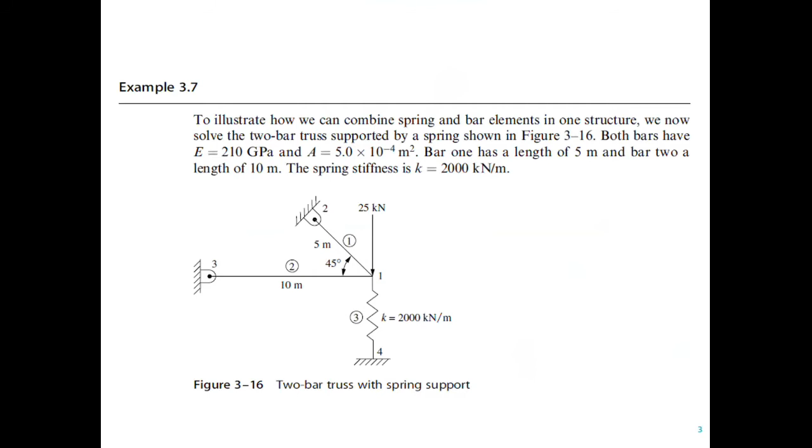I don't have to work with this machine, right? See, my default is taking me here. Okay, now let's have the... how do you move the... I'm using the arrows but the arrow is not working. Escape. Space. Space will work. Yeah, did we do this problem? Yes, yes, okay.

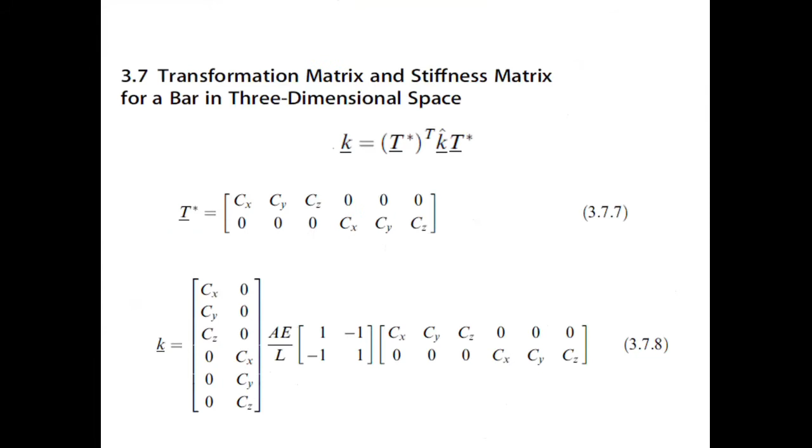This is what? If somebody asks, what is this? Everybody with me now, you have to be all on track. Okay, this is what? This is transformation. No, this is the stiffness matrix.

Of a 3D truss element in 3 dimensions, right? Yeah, with respect to the global system. Those who are coming here, they didn't come last time. You have a member, a truss. The local - this is local. Yeah, global, this is global because there is CX, CY, CZ. So basically, if you have a truss member, and this is node I, and this is node J, and this is X, Y, Z.

The direction or the location of this truss, what comes the global axis? The local axis should be x should be along the member, right? You remember this? Yeah, this is your x prime. This is your y prime, and this one here is z prime. So the prime system is called local. The x, y, z, the unprime system is called global.

Okay, so I don't need z bar, I don't need y bar. The only thing I have to define is the location of x bar with x, x bar with y, and x bar with z. So x bar with x, we call it alpha. X bar with y, we call it beta. And x bar with z is gamma. And then we define cx, cy, cz.

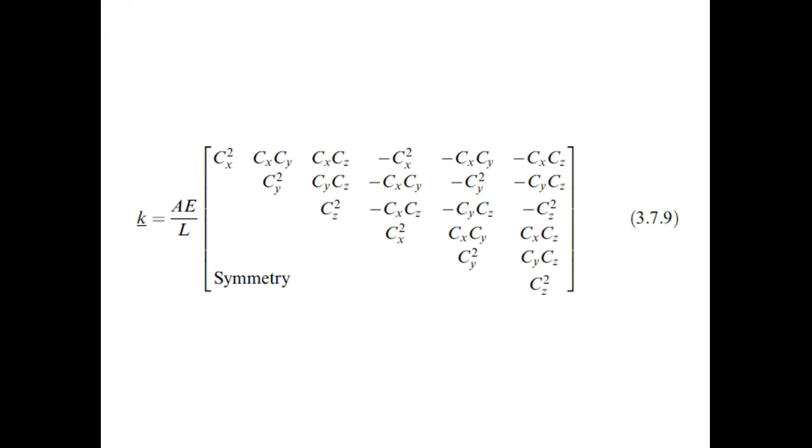Anybody will tell me what's the cx? Cosine what? Alpha. Cosine alpha, cy, cosine beta, and then cz, cosine gamma. That's it. And once you know the direction of alpha, beta, gamma, then you can find the stiffness. Okay, in fact, we solve a problem here. We solved this problem, if you remember.

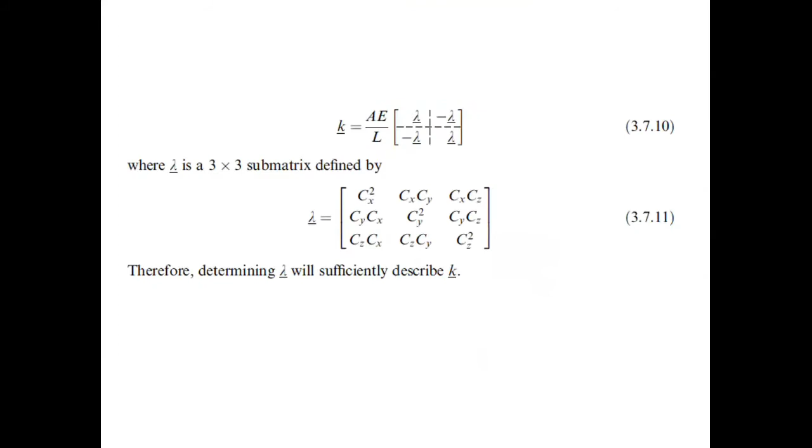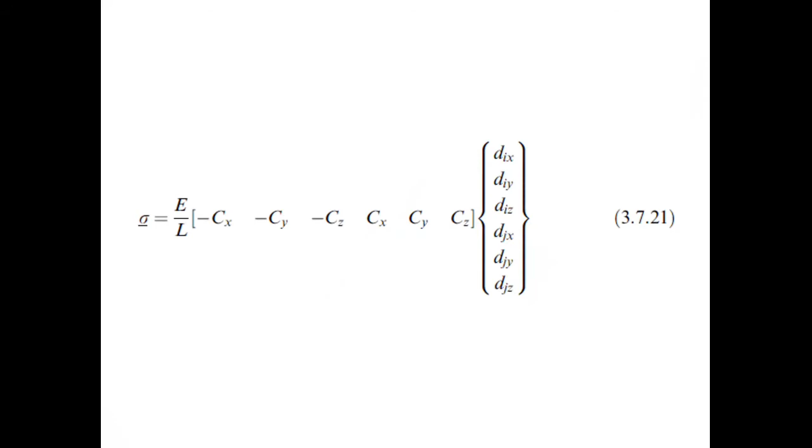This is always what we call transpose. Any vector D, if you put D like this, it means column. If you put D transpose, it means row. Anytime you see transpose, it means row. Anything you didn't understand, we'll talk about it now, when deriving something else.

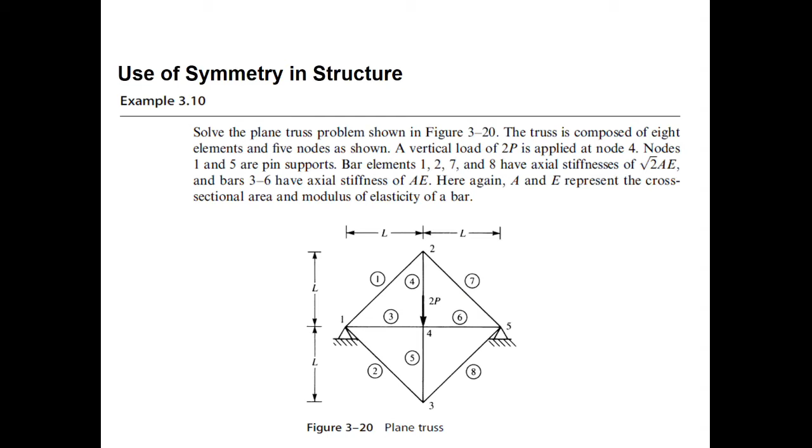Because you are slicing it, you use half of the stiffness to the right. We use the left part, we put P, but 4 and 5 is half of the stiffness.

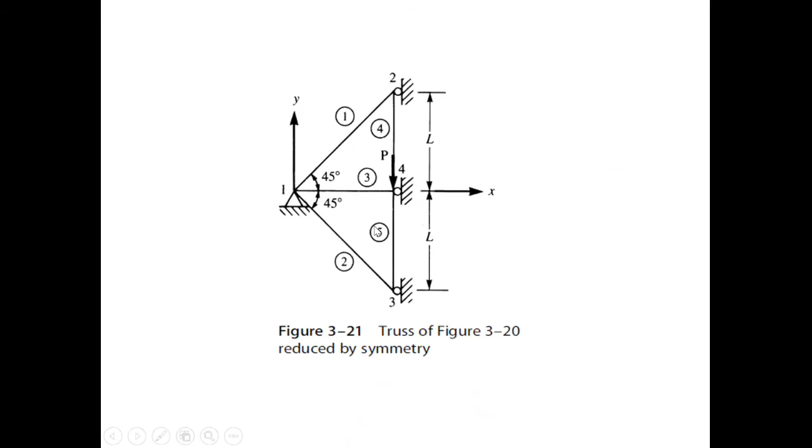So you can see that we got theta. What is this theta? This is alpha. We only need to define alpha - alpha with X, alpha with Y, and alpha with Z.

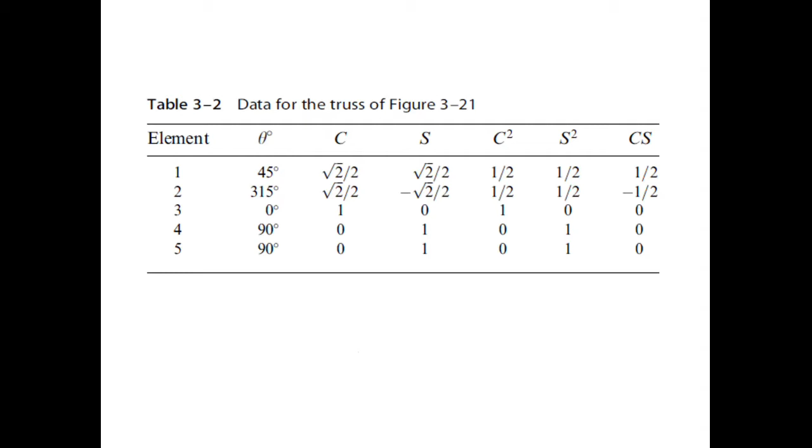Which is CX, this is 2D. Which means alpha, which means X prime with X and X prime with Y. So it is C and S. That's 2D - I think we got 3D too, right?

Let's talk about this. What happened here? If you have a truss like this, you can see. We already did this - well, we didn't do it exactly, I just mentioned it but didn't explain it. So I'll explain it now.

Now what do we have here? One, two, three nodes. And how many members? 3 members, 2 supports.

The problem is that we always need to define our boundary condition with respect to the global, but sometimes we cannot define it with global. Like support number 1, you will say U1 is 0 and V1 is 0, but you cannot say U3 is 0 and V3 is 0 - you cannot define it with respect to X and Y.

So you have to define it with respect to the local. It means you have to talk about U3 prime and V3 prime. Which one is 0? V3 prime is 0, but U3 prime is not.

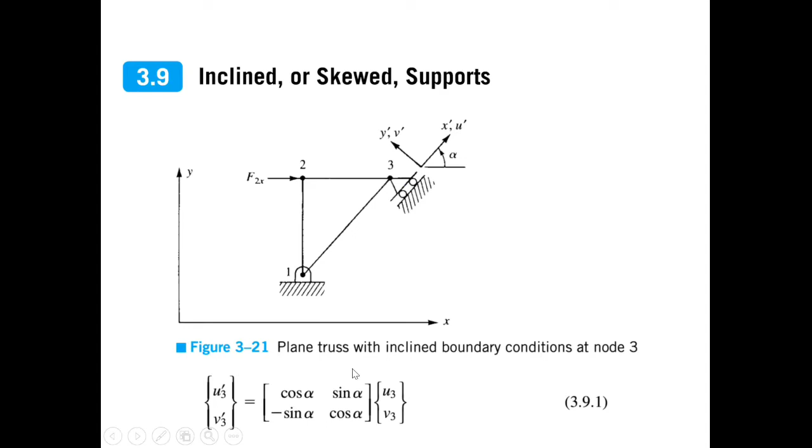So how do we do that? The problem is that this is the local displacement - you are making them global displacements through transformation. You already know that.

This is the global displacement. If you multiply by the transformation matrix, which is 2 by 2, you get the local. How do you go to local? This is the transformation, we call it T1, and this is D. Now how do you find D?

If you want to find global, what do you do in this equation, 3.9.4? You have to multiply both sides by T1 transpose. This one will be T1 transpose, and if you multiply here by T1 transpose, it will be identity. So you'll get D - do you agree that D will be equal to T1 transpose times D prime? Yes.

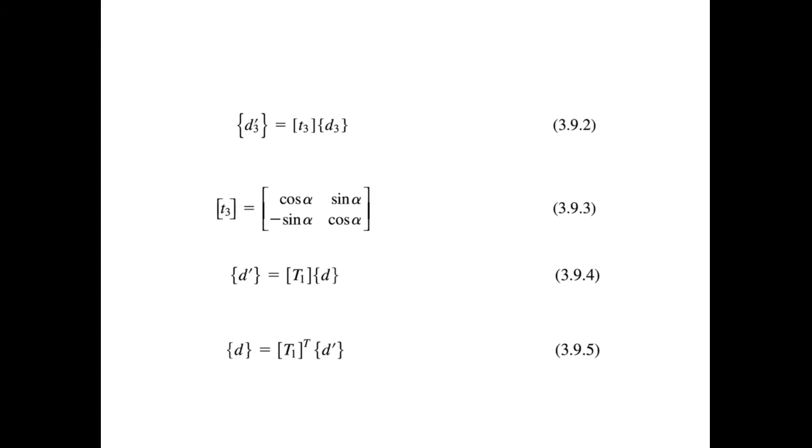So where do you need transformation? You didn't need transformation for node 1, you didn't need transformation for node 2, only for node 3 - this is why: identity, transformation. Now can you tell me this square submatrix, what is the size of that - the small one inside, like I, 0?

2 by 2. Because the transformation, already you have it 2 by 2, cosine sine, right? It's 2 by 2 because you have only 2 displacements. This is 2 dimension. We talk about 2 dimension, okay?

So this one here, the T1 will be, what is the size of T1? 6 by 6. 2 by 2, 2 by 2, 2 by 2. If you don't understand, you have to ask me, okay? Who didn't answer? Who didn't understand this?

You have 3 nodes. Node 1, node 2, node 3. For node 1, global, so you put I. For node 2, you put I. Also identity, I means identity: 1, 1, 0, 0, right? And 0 matrix means 0, 0, 0, 0. Okay, so you will use this as your transformation.

Look here, this is your transformation. What is this? Local. What is this? Global. Okay, let's talk about global U1 V1 with local U1 prime V1 prime. What do you think? It will be the same, right? Because this is 0 and this is 0. You will have these zeros.

Okay, what about node 2? Global, you multiply it by identity equal to local. So it means what? Same.

Look at node 3 where you have inclined support. Do you think global is the same as local? No. Global U3 V3 equal transformation times local. So you can see here that you have to have that, you have to have transformation like this. But this is only an intermediate step, this is not the whole step, okay?

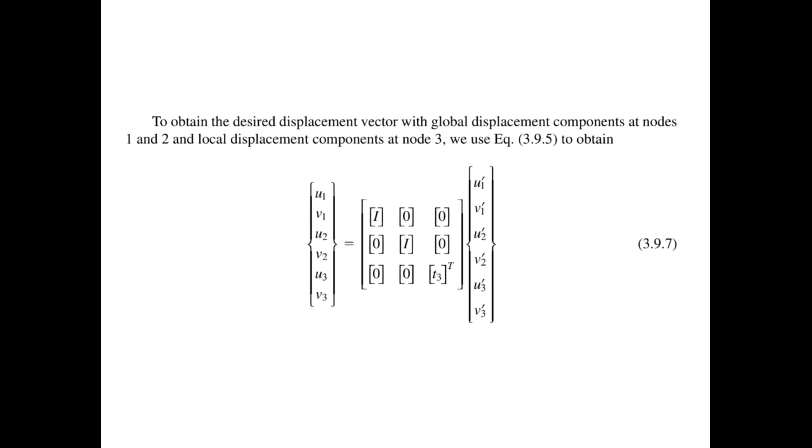So we want to get something like this. I hope you understand this page. This page is crucial, okay. The first one, do you understand the first one? The local equal transformation times the global.

We have it before. Okay, now how do you go from 3.9.8 to the other one? What did we do? No, how do you go from 3.9.8 to 3.9.9? This is a normal equation. They have nothing to do, right? They are independent. One is transformation and the other one is force equal stiffness times the displacement, right? They are not related, okay.

Now go to this equation and multiply the second equation by T1 here, okay, and T1 here. K is K. And instead of D, I put what? T1 transpose D prime. Do you agree?

Okay, now you are the boss in mathematics, mashallah, right? Can you multiply three matrices together? Yes, using Mathematica, and you give me a big matrix. You can do it, right?

Have you noticed something here? Notice here, what happened? For 1 and 2, you put it global. For 3, you put it local. Look at the forces. The forces at node 1 and node 2, global. But the forces at node 3 is what? Local. So it's mixed mode.

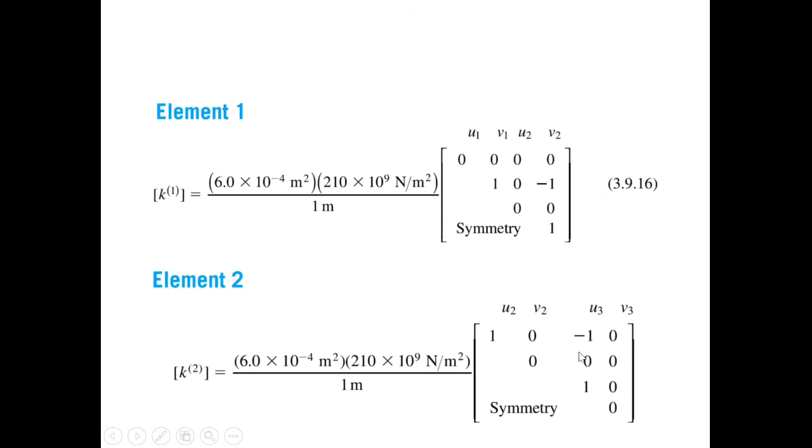Yes, look. Element number 1, it's connecting node 1 with node 2, so U1, V1, U2, V2. Okay, for element number 2, global. We didn't talk about the support here. Okay, even for element 3, U1, V1, U3, V3, everything with respect to the global.

So the total stiffness will be with respect to the what? Global. Okay, can you assemble those? Yes, it's here. So this is U1, V1, U2, V2, U3, V3.

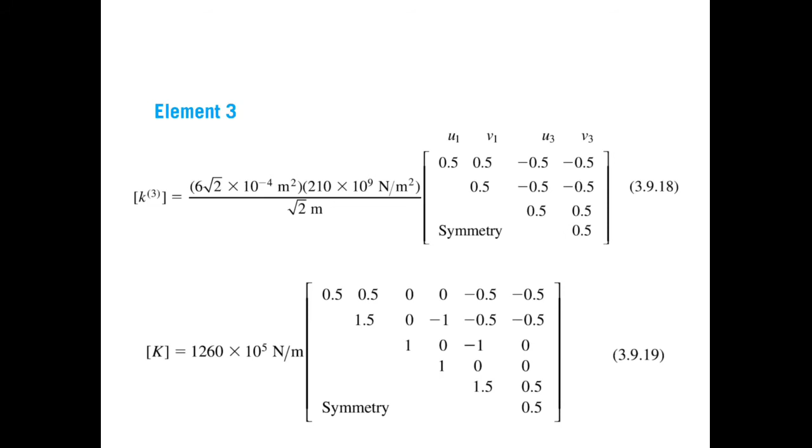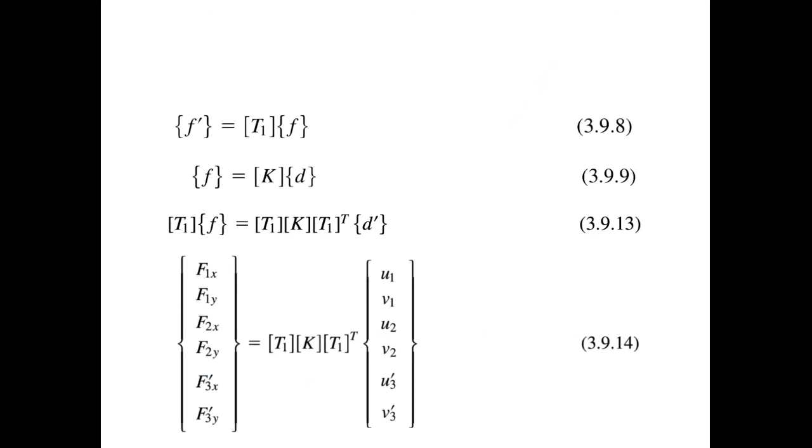What is U3 prime and V3 prime? Not here, you have to apply it in the equation. The only thing now you have is what? Capital K. So you have only this. You have to know what is T1 multiplied by T1 transpose. Okay, so we finish now with capital K.

T1, node 1, what? 2 by 2 identity. Node 2, identity. Node 3, this is the transformation: C, S, minus S, C, right?

Okay, take this one, multiply it by transpose and do everything. You see, T1 K T1 transpose. If you do all of this, you get this. But now, once you multiply them together, then you have U1, V1, U2, V2, but you don't have U3, V3. What you have? U3 prime, V3 prime. You have different steps. Easy.

Now, can you tell me what would be the forces?

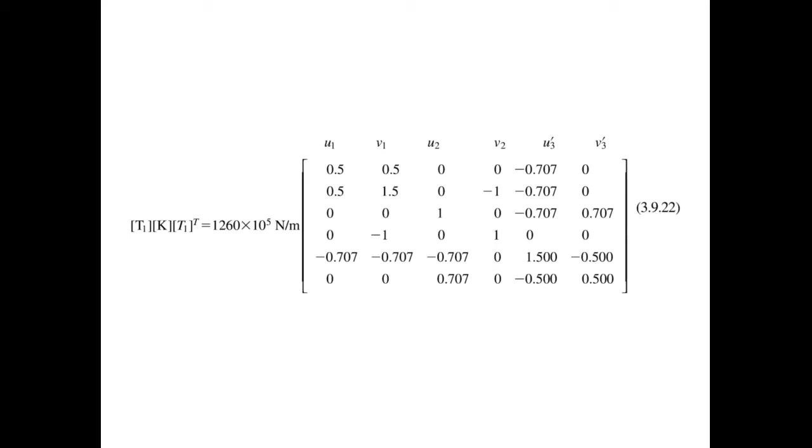Do you know what is U1 and V1? Support 1, hinge, we know them. Okay, you want to see the figure? Okay, U1, V1, how much U1? Equals 0, equals 0, unknown, right?

V2 is for the support 2. Which one is 0? V2 is 0, okay this is 0. What about this one? Unknown, which one is unknown? U3 prime? Both are. No, U3, you get it. Roller, so which one is 0? V3 prime, right? It cannot move perpendicular, so V3 is 0.

So now, very good, you found what? 4. You need to have more, 2 more. Okay, let's go to the forces.

F1x, do you know it? Reaction. F2x, reaction. Let's go to node 2. Do you know F2x? Yes. So how much is that? 1000, I don't know what's the unit. Okay, maybe you need to multiply times 10 to the power 3.

Up, not this one, 2x. This is unknown, okay this one. What is 1,000? 1,000 kilonewton. Okay, times 10 to the 3 Newton. Okay, what else?

Unknown, unknown. What about here? That is the 3x prime. No, 0. Which one is 0? That is 3x prime, is there any force in the x prime? No, there's no force in the x prime. No, this is 0. Wow.

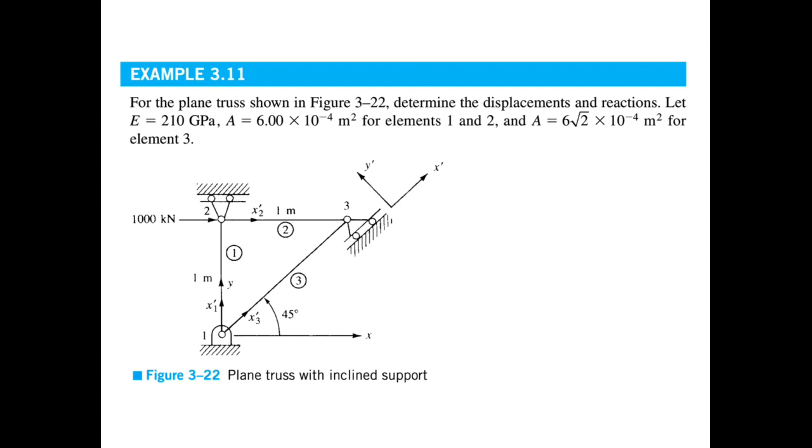Yeah. Okay, can you generate the second equation? Let's see the 2 equations with the 2 unknowns U2 and what? U3 prime. Let's see. I want to see U2 and V. It is here, right? Did you see it?

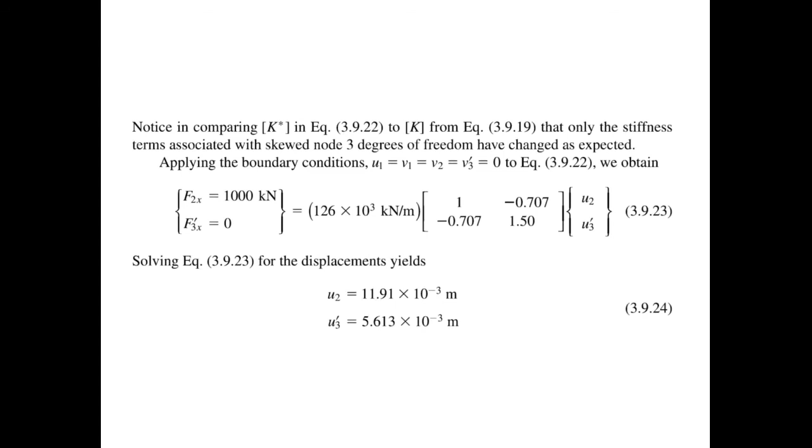What did you see? No, U2 and U3 prime. U2 and U3 prime, right? Okay, can you solve for U2 and U3 prime? Yeah. Can you solve for the forces? Yeah, yes, just substitute. Interesting, right, this inclined support. Okay, the idea here is that you have a mix between global and local. Okay, local if it is inclined, global if it is fixed.

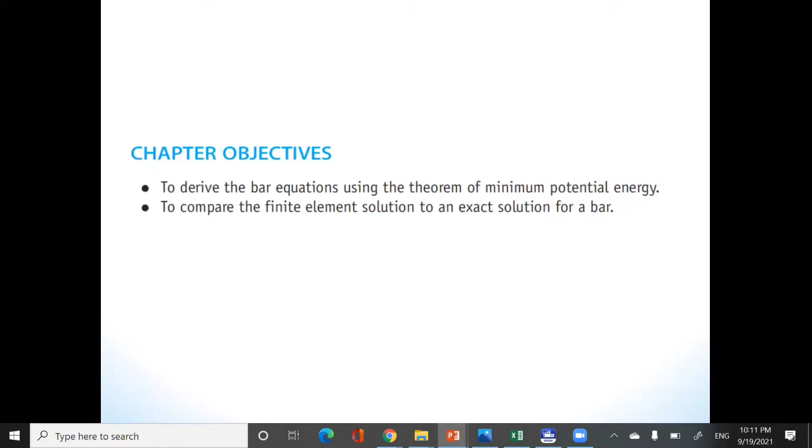So for spring, by the way, you asked me there is a problem with this F equal to K delta square, right? You asked me about this.

This one here gives a different answer because the units for K are wrong. Because you should have force. So this one is force per unit per meter square, so that times meter square, you get force. You should figure this out, right? So K is different, not always Newton per meter. If you say F equal to K delta square, then K will be Newton per meter square, and delta square will be meter square. Then the answer of F will be in Newton.

Okay, coming back to this anyway. So this is a rod here, and we are talking about 1D, and there is a force P. What happened to this? It will create stress, sigma X, uniform, and it will create strain. So now we want to get U and potential energy for this rod.

This one here is your delta, okay? How much is the displacement? It's delta X. So you have to multiply delta X, which is like the original length, times strain on that element, which we call delta strain. Okay, this will be clear in the next slide. Here we go - if you multiply sigma X times delta Y, delta Z, that will be the force. If you multiply the force by the displacement, and the displacement will be delta X times d strain X.

This will give you the internal strain energy. But this is per unit volume. So if you want to get U, what do you do? You multiply it by dV. Do you agree that this delta Y, delta Z, delta X is called delta V? It's the volume of the element. Yeah, now this is du. Why do we put du?

Because this is the strain energy for the element, du. So how do you get the strain energy for the whole bar? This dV, you integrate over the volume. If you do the triple integration, you will get this here, which is the strain energy.

To keep this in mind, imagine this is sigma x, and it's linear. This is sigma x, and this is epsilon x. The area under this curve is what we call U star.

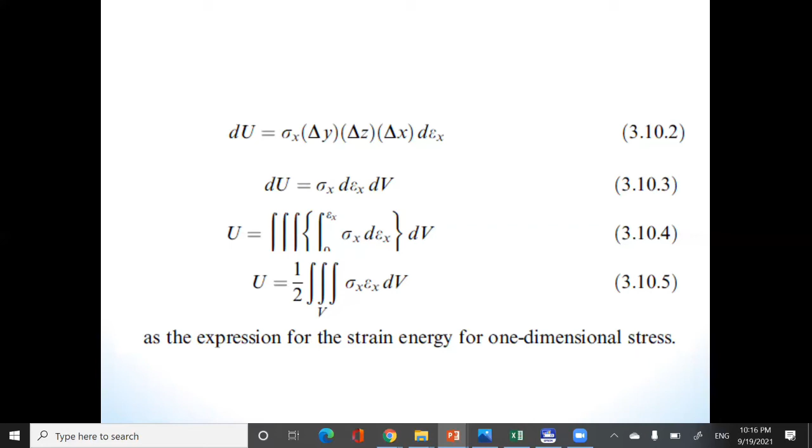Omega. Is this called omega? Okay, omega is the external work. So the external work done, with a minus sign, will give you the potential energy. What kind of forces are in the bar? There are three kinds of forces: there is body force, the weight, body force,

forces which are applied on the surface, and concentrated load. Very simple: distributed load, distributed force, which is like traction, body force, and concentrated force. These are the three forces, right?

So there are three terms here. The first one is the body force. You integrate over the volume. Look here, you are multiplying displacement times the body force. And this body force is body force per unit volume. This is why you multiply the body force per unit volume times dV and integrate.

Okay, what about T? What is it? Traction, which means force per unit area, so you have to integrate over the surface, the area. What about here, F? It's concentrated force, you just multiply force times displacement. So one time you multiply directly the force by the displacement, which is concentrated force, which you see at the node. Node 1, node 2, there is F1x and F2x. These are concentrated force. We finished that.

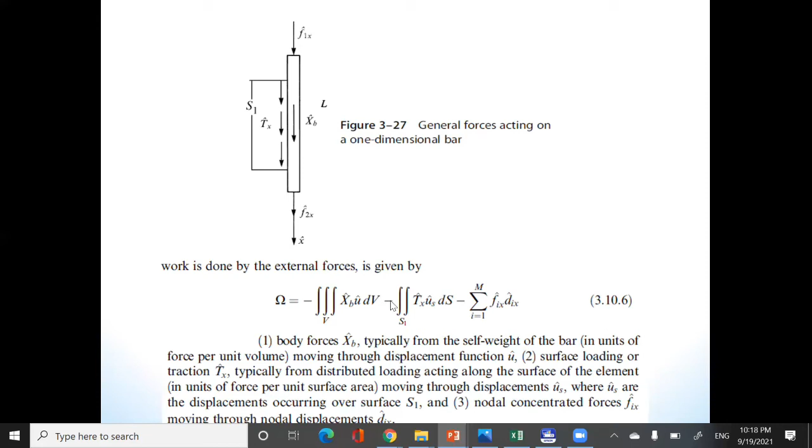So we take these two equations and put them together. So what is this? Do you understand this?

Okay, what if you have a rod here? This rod has an area, right? And it has dx, so dV will equal the area times dx. Put the area dx here, so you have to integrate over the length. You see, from where to x? So A times dx is dV. A is constant for the rod, put it outside the integration, so you integrate over the length.

This term here is U. This is the external work done. This is the work done at the two nodes. This is for surface, and this is for body force. So all of the force is here, and this one here.

But anyway, we want to get to something like F equal to K times D. We want to reach this. How do we do it? This is pi, the total potential. Remember what we do for the spring in order to get the stiffness matrix using minimum potential?

You did homework, what did you do? You have to differentiate, right? Differentiate with respect to nodal displacement, D1 and D2. Because this one here is D2 and that one is D1. So look here, this is D, you have to differentiate with D1x to get one equation, and differentiate with D2x to get another equation. From there you will get the stiffness.

Okay, this is now a very good question. This is sigma x, this is epsilon. Is this a scalar? Yes, this is scalar. What about this, is it scalar? Yes, all of it is scalar.

What about here? This one is a displacement function. Do you think this is scalar? Yes, we multiply this one of them. Oh, this is a vector. And this is a vector. No, this is a vector, and this is a vector. Look, the hat means vector.

This vector, not product, huh? Not product, it's dot product, which means what? Dot product means scalar. It means scalar. Scalar means that this is U transpose, and this is a row column.

Because it's a scalar, that's why I explained to you about D transpose. So the first U, this is transpose, and the other one is this U scalar. So scalar, this is what? Row, this is column. This is row and this is column.

Okay, what is U? U in a vector form. We know it. U equals summation of Ui Ni. Or if you want U, it's called N1 U1 plus N2 U2. Look at it. U is a vector. This vector is called shape function, which is like row times the nodal displacement, which is column. See? N is a row, D is a column. So if you take N is a row and D is column.

So what's the strain? What's the strain definition? By definition, what's the strain? Derivative of U. Yeah, strain equals partial or du dx. Okay, so what does it mean? But U here, we said d dx of U. U, what is U? U is Ni Ui.

Ui is nodal displacement. They don't change with respect to x. The only thing that changes with respect to x is N. It means dNi dx Ui. It means dN1 dx, dN2 dx, times u1, u2. So you are taking the derivative of the shape function.

You are taking the derivative of the shape function because the strain here, look, strain is du dx. But you don't take the derivative of the nodal displacement. They are not function of x. They are specified at a certain location. So what you need to take the derivative of is the shape function. And this one here is dn1 dx, and this one dn2 dx.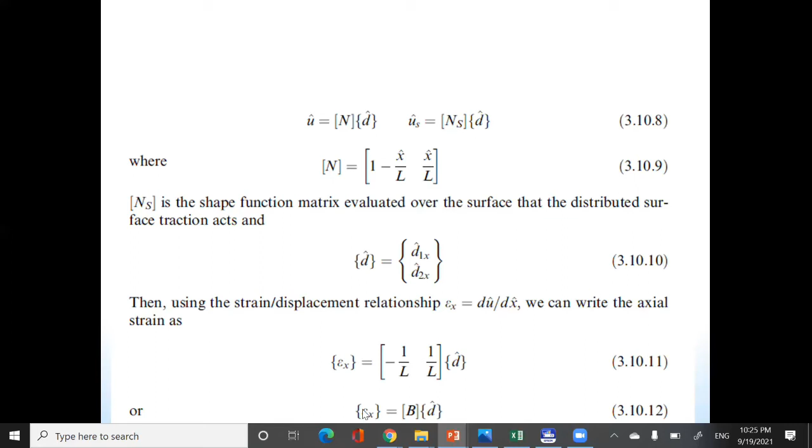Okay, this is now the strain. Very good, we have the strain. What else do we need? Remember the pi. Remember the pi. All of what you are doing, you are finding this. What about the stresses? Because you have to put everything in terms of nodal displacement. How are you going to take the derivative of pi with d1x? Where is d1x here? We don't see it explicitly. That's why we put the strain in terms of the displacement, but we have to put also stress in terms of displacement. How?

Modulus. Constitutive relationship between stress and strain, right? So sigma equals E times epsilon. And this is only 1D. If it is in 3D, maybe you'll have sigma x, sigma y, tau xy. You'll have a matrix. And you'll have here strain x, strain y, gamma xy. This one is called D matrix.

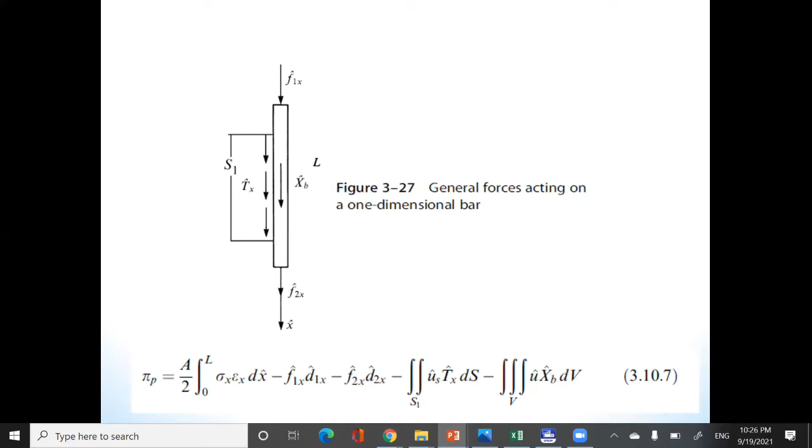So the relationship between stress and strain is called D. But for only special case that this D matrix becomes a scalar and it becomes E for the sake of uniaxial. Okay? So this is why we want to derive things in general. Look at it here. In general, you see sigma equals D times epsilon, but only in this case because it's uniaxial, D equals E. So what do you have? Strain, stress equals D times epsilon. What is epsilon? B times D. Shape function, derivative of the shape function times D.

Can you take this stress and you multiply it by BD and you tell me what would be strain energy? It's here. Okay, look. U, just U, what is U? You said it's half integral over area sigma x epsilon x dx. Okay, integral. We said sigma is what? Sigma from here. D is what?

D times B times D. This is all stress. What about the strain? B and D, dx.

Is this a scalar or not? Scalar. Are you sure scalar? No, I don't see scalar here. What is the scalar? At the end of it, scalar. No, it will not be. It will not be scalar because D is what? 2 by 1. B is what?

Okay, look at it here. Wow, it's here, yes. You see now? You see the stress transpose, D transpose, right? D transpose, B transpose, D transpose. All of this is what? All of this is sigma. What is the strain? B times D. Very good.

We finished now U, and this is scalar. If it is scalar, D transpose, it means what? Is it row or column? Row. What about B transpose? You multiply row by row. Row by column.

Okay, anyway, this is scalar. What about this? D transpose. Look, load column, look at the surface. You see D transpose. Every time the first one you put a transpose, it means row. The thing that follows it is column.

Okay, now do you think everything has D? Because we want to integrate with respect to D. Do you think everything has D? Yeah, this has D, D. This has D, this has D, this has D. Okay, very good.

Now, I have to tie my shoes, right? Otherwise I'll fall down. Okay, very good.

Now what is next you will do? Expand it, expand it, expand this, and take the derivative with respect to D1x, D2x.

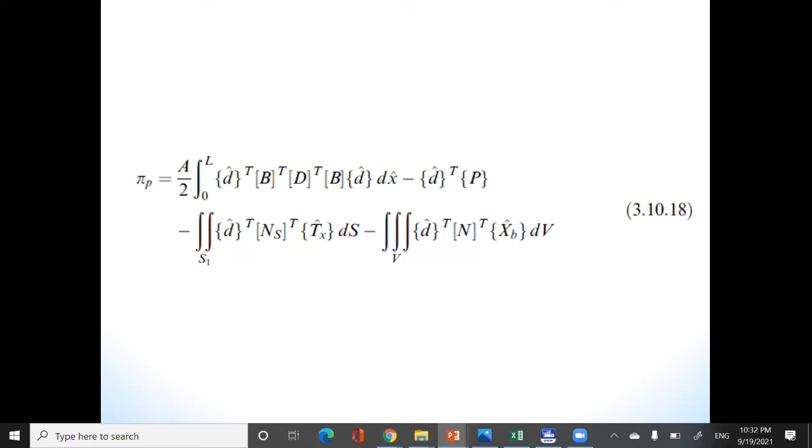But this is before taking the derivative, and the right-hand side, and then I can take the derivative. Okay? Very good.

So look, Pi equal. This is the strain energy, and this is the omega. Okay, now how do you take the derivative of this? Do you see the three terms here? This is due to concentrated force. This is the force which is surface, and this is the volume.

Okay, now take pi with d1x and pi with d2x. Now you come to dt, bt, dt, bd. What did he do? He substituted this.

So d transpose, the first term is what? D transpose in pi, you have to tell me. D transpose the first term, and then multiply by B transpose D. I want to have this in closed form solution explicitly. Okay? So explicitly it is here. Look at it.

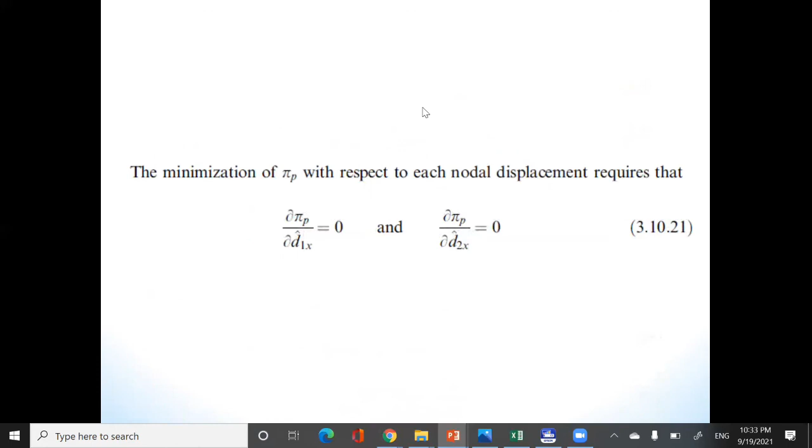D1x, D2x, it's a row. B, derivative of the shape function transpose, it's minus 1 over L, 1 over L. And what about D? D is only E, E, 1 by 1. What about the shape function? Minus 1 over L, 1 over L. What about D? It is D1x, D2x.

Do you think if you multiply all of them, they will give you a scalar? Yes, it gives you a scalar here. All of this, if you multiply it by the volume, which is area times L, that will give you...

Can you combine this with that? Because you have D1x, D2x everywhere. And then you take the derivative. When you take the derivative with respect to d1x, you get this equation. When you take the derivative with d2, you get this equation. So this is one equation and this is one equation. What do you want to do with this?

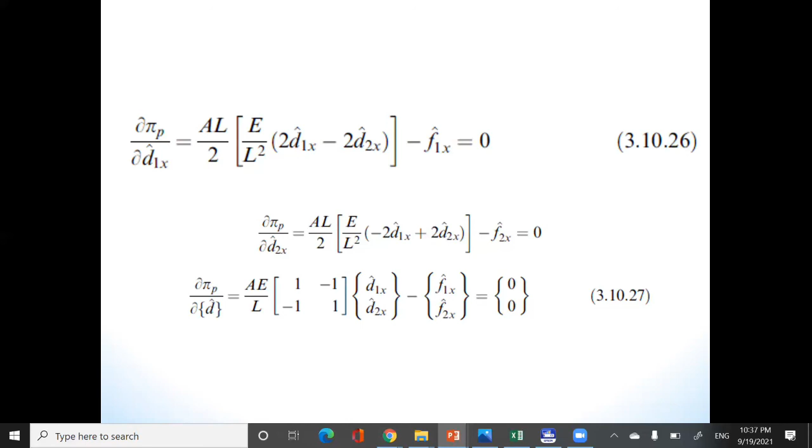What's inside now? One, minus one. Right, minus one, one. That's it, we got the stiffness, right? EA over L, 1 minus 1 minus 1, using the minimum potential energy. Okay. This is now the stiffness K, and it is coming with this pi with respect to D.

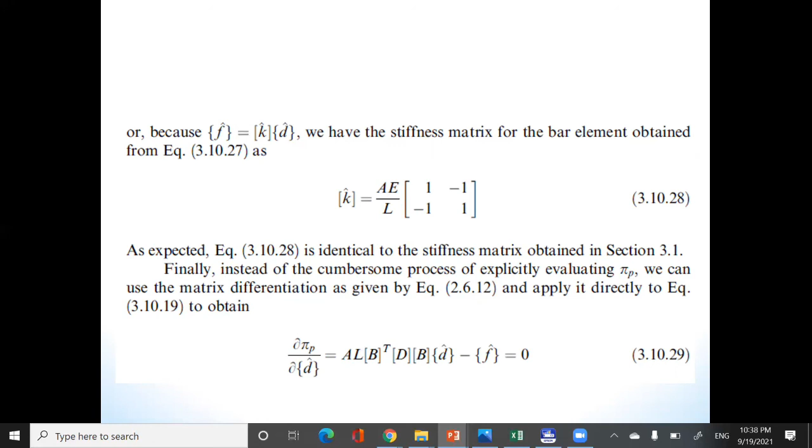Now you already know how to get the derivative with respect to D in explicit form. Can you differentiate with vector? If you differentiate with vector, you just remove the D. Look here, look at the pi with D. I want to see the pi with D, not X. Did you see it here? Do you see the pi here? D transpose and D transpose. When you take the derivative of pi with D, you just remove the D transpose.

In the first term, what is pi with respect to D? It will be A L, then times what? B transpose, D transpose, B times D. What about the second term? What is the derivative of the second term? Only F. That's it. Anytime you see any pi with D transpose in the beginning, when you take the derivative, you just remove the D.

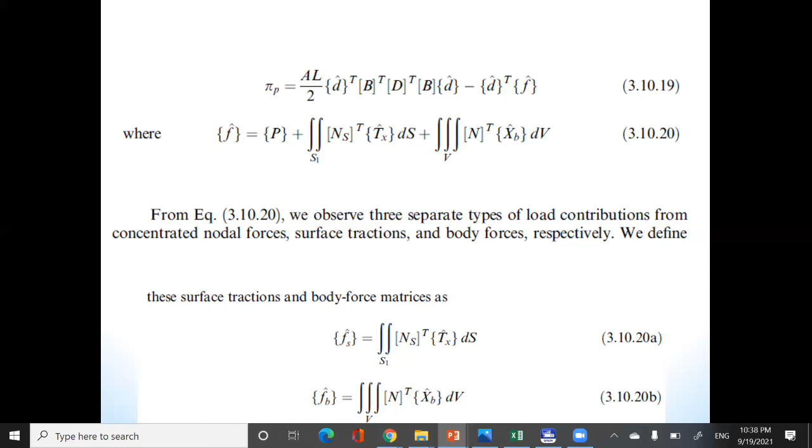Okay? Now, I guess you are fed up, right? Not really. Okay, just use this example. We have to give an example before we leave, right?

Okay, this is a very good example. Now tell me how to find... I always go here. What about here? If this is node 1, this is node 2, and there is a load, this is traction, because you have 3 kinds of forces: it's either body force, nodal forces, or traction. When you have traction force... what do you do with the traction? You have to integrate, you have to convert all the forces to the nodes.

If it is concentrated, thank you very much. If it is uniform load, you have to throw some of it to this node and some of it to this node. If it is body force, you have to throw one to this node and one to this node. Now I'm giving you a triangular load.

Can you tell me how much of this load will go to node 1? That's called F1x. And how much of this load will go to node 2, F2x? If you answer this question, we'll finish for today. Very simple. What do you think? First, by common sense and your intuition.

Find the centroid of the loading. Can you do this in your mind? Find the centroid of the loading and tell me how much the load will be. Of course, the load is force per length.

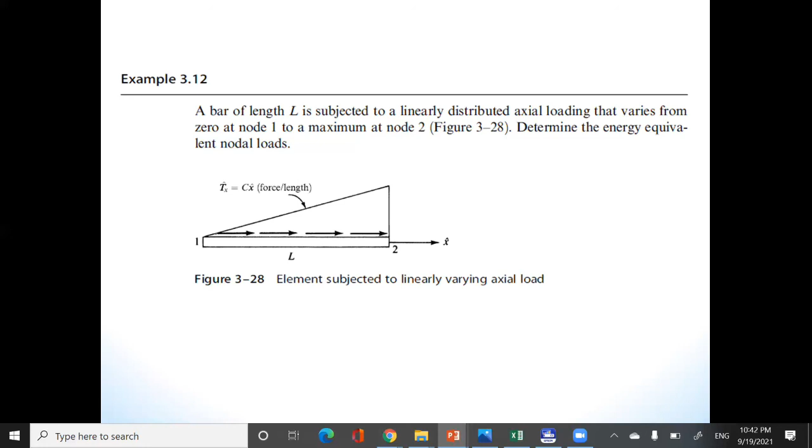You have to use this. Do you remember this equation? The load equals N transpose times T times ds. Right, we had this before. Row, column, scalar, right? See? N transpose T ds. What is N transpose?

Is it the derivative of the shape function? No, it is the shape function, but it should be a column. So you see the column: 1 minus x over L, and x over L. And C is constant, so it is Cx. And then you put dx. So can you multiply this row, this column, by this?

Just multiply 1 minus x over L times Cx. You get this, do you agree? Yes, and this one is that. Okay, now can we integrate it?

What is the first term on top, before integration? It will be Cx minus Cx squared over L. Do you agree? So can you integrate it?

Cx will become Cx squared over 2, and the other term, Cx squared over L, will become Cx cubed over 3L. So you get that after integration. And what is the second term down? x over L times Cx gives Cx squared over L, integrated it becomes Cx cubed over 3L.

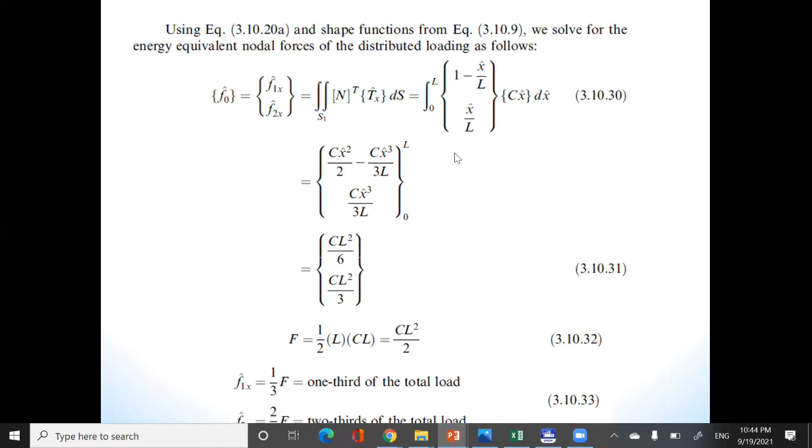Okay, now we have 1 minute left, right? Only 1 minute left, finishing on time, right? Exactly, good job, great, right.

Okay, who's not here? Now everybody decided upon the group, right? Have you decided which two rooms? We already recorded our names last class. I don't know, there's a new guy here, right? No, someone chose me. You didn't choose him, right? Yeah, someone chose you. Who chose you? He's with you. Okay, thank you very much.